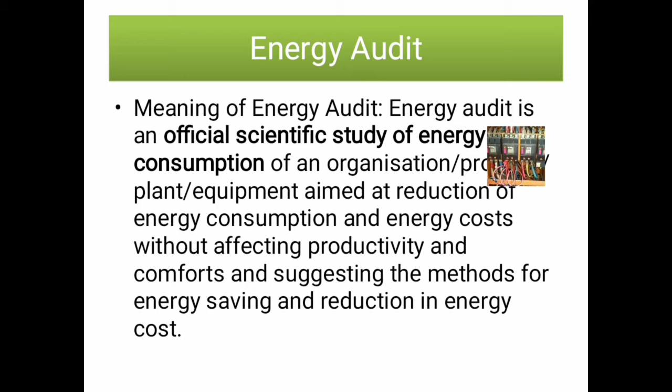So energy auditing can be defined as an official scientific study of energy consumption of an organization or process plant or equipment aimed to reduce the cost of energy, or indirectly we can say the energy audit is to reduce the operating cost of a process or manufacturing cost of a product. So the primary objective of energy auditing is to establish quickly and reliably the basic relative cost of the various forms of energy purchased, their main use, and to identify machine locations where losses, wastages or inefficiency occurs.

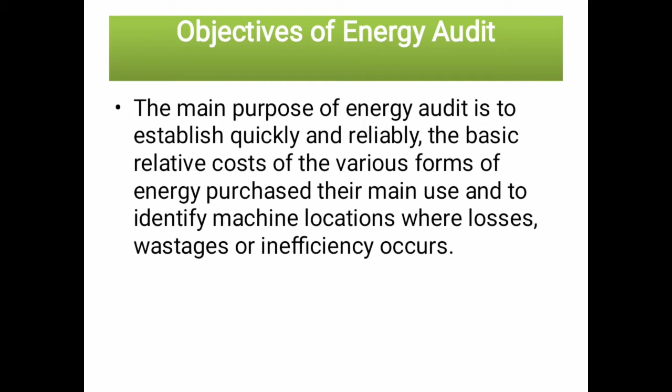So the energy audit team will visit the industry. They will study all the energy consumption equipment. They will study the operating patterns, efficiency of the equipment, energy consumption per hour, per day, per week. They will analyze all the energy bills, oil rate, oil consumption, and finally they will arrive at a conclusion, and also they will suggest some possible ways to reduce the energy cost. So this is the objective of an energy audit.

So energy auditing can be carried out in two types of energy audit. The first one is preliminary audit and the second a detailed audit. The preliminary audit is the pre-audit. So before going to the detailed audit, a preliminary audit will be carried out 10 days prior to the detailed audit, in which they will raise some questionnaires, which is going to help the detailed auditing.

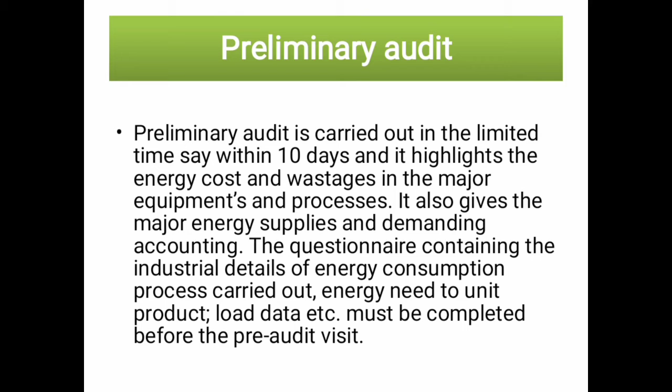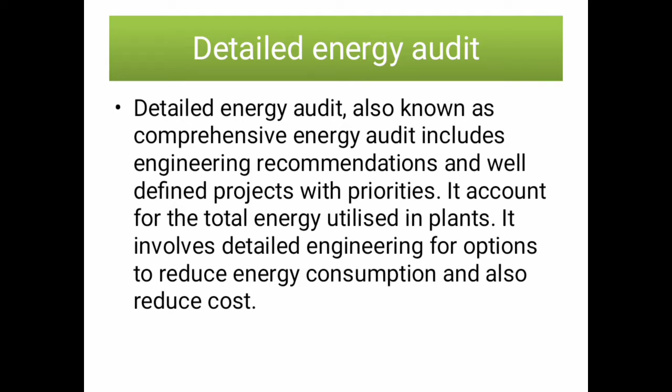So the next, detailed energy audit, includes the overall audit of the entire plant. The plant is divided into several sections. Each and every section the audit team will visit. They will thoroughly analyze the energy consumption pattern of each and every energy consuming equipment. So detailed energy audit includes overall system audit, functional audit, utility audit, and modernization audit.

So overall system: the entire plant, right from the security to dispatch, whatever areas we use energy, whether it may be electricity, petrol or diesel or kerosene, or steam, whatever the source of energy, all the energy consumption equipment has to be thoroughly analyzed, and they will come to a conclusion. Then functional audit: in a plant, a particular unit is taken for consideration. For example, an oxidation plant or a purification plant or a packaging section which consumes more energy, which needs more attention for conserving the energy. So they will audit only that functional unit. That is called functional audit.

Then utility audit. Utility includes the boiler house, compressors, fire hydrant water, cooling water. So the energy utilization in that utility area will be audited and they will suggest some improvement tips.

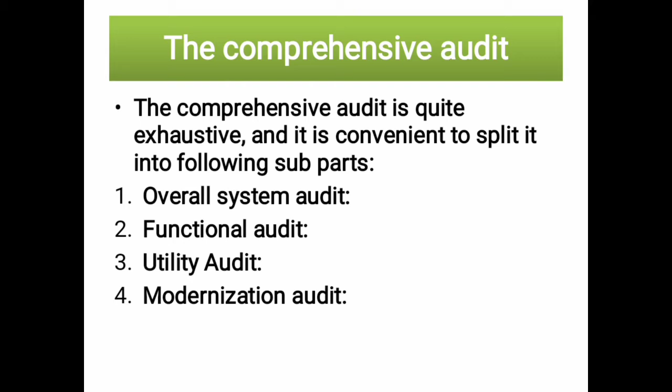Then modernization audit. Within the existing plant, they will go for some modernization of an equipment or a plant. So whether this modernization process will lie within the affordable limit of the energy cost. What will be the additional energy cost we have to invest for modernization? Then how to optimize this energy cost or to reduce the energy cost? The audit team will analyze and they will suggest some useful tips. So this is comprehensive audit.

So typical steps of energy audit. Energy audit can be carried out in various steps.

The step-by-step operation of energy audit is preparation and planning, data collection and review, plant surveys and system measurements, observation and review of operating practices, data documentation and analysis, reporting of the results and recommendations.

So preparation and planning. Before going for auditing, we have to do some preparation and planning. What are the areas to be audited? What are the potential areas which consume more energy? Then what are the data we have to collect from the plant? Whether the EB bill or oil bill, oil consumption, the equipment efficiency, the equipment running time, like that. They have to collect the data.

So before we go to audit, the energy management team will decide what are the areas to be audited, what are the data to be collected, and what review method we have to adopt. Like that they will plan. Then plant surveys and system measurements. What are the plant areas to be surveyed and what systems have to be measured. What measurement system you have to adopt, whether we calculate it in kilowatt hours or oil gallons per hour, like that. They have to decide.

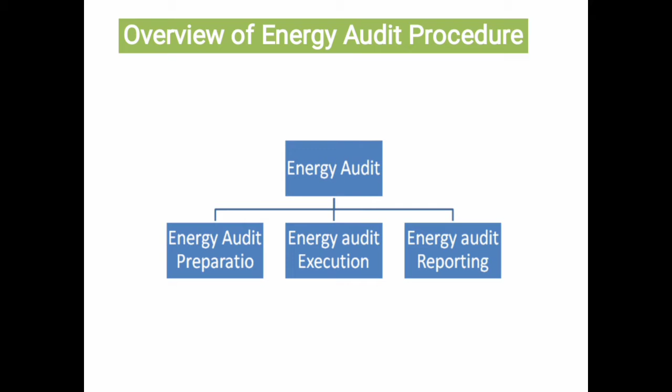So preparation and planning includes audit criteria, audit scope, selection of audit team, audit plan, checklist preparation, initial walkthrough, collecting energy bills and available data, preliminary analysis. Audit criteria includes audit objective, audit type, audit methodology and standards, staff involvement, site or utility boundary, timeline, reporting requirements.

So the audit objectives. What is the objective of audit? By this audit, what are you going to achieve? Whether we are going to optimize the cost, improve the efficiency of the plant, or study the energy consumption pattern of a particular equipment. Like that we have to define the objective in the audit criteria. Then audit type, then audit scope. What are the limitations for the auditors? What are the areas they have to visit? What are the areas we have to include in the particular audit? Like that we have to define the audit scope.

And the selection of audit team, whether we go for internal auditor or external auditor. If it is internal, interdepartmental or intra-departmental audit, like that we have to plan. If external, whether the auditors are from an accredited institute or non-accredited institute. Then audit plan, checklist preparation. Before handing over the schedule to the auditors, we have to prepare a checklist to check whether all the items have been included or not.

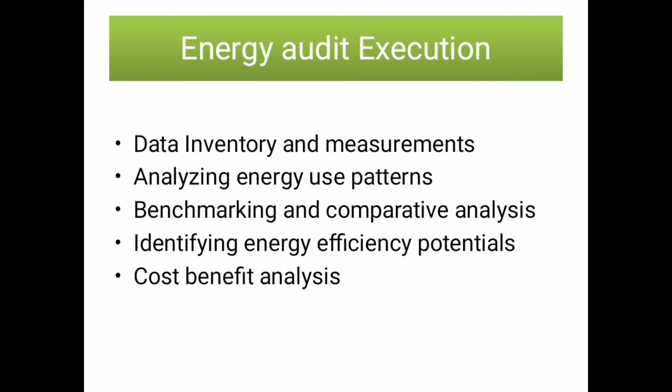The next, energy audit report. So all the findings of the energy auditing will be reported in a systematic manner in a standard format. That is called energy audit report. Writing energy audit report. So it includes post audit activities. After the report writing, the post audit activities will be carried out: the preparation of action plan for implementation and implementing the action plan.

So what are the corrective measures we have to adopt? Is there any technology upgradation required, or some modification required, or some addition or deletion of equipments or instruments? All the things will be prepared and suggested in an audit report. So after that, the implementation of action plan.

So this is the overview of an energy audit. First, preparation and planning, preliminary auditing, comprehensive auditing, audit report and post audit activities. So these are the overview of an energy audit.

Now let us throw some light on what is audit criteria. So it includes audit objective. Audit objective means what we are going to achieve after completing this audit. What are the areas to be focused? Whether we have to improve the efficiency or reduce the cost or reduce the energy consumption. That is the objective of an audit.

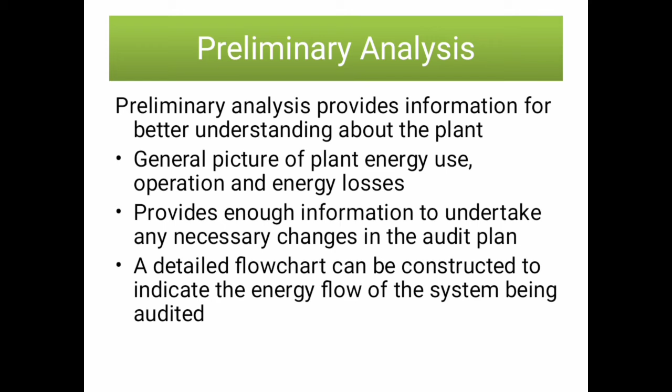Then analyzing energy bills. It includes electricity bill, natural gas bill, and coal and fuel oil usage. So calculating electricity use per day, kilowatt hour per day. Using this kilowatt hour electricity usage, they will find out the load factor. So load factor is equal to energy consumption for the period divided by maximum demand and time under consideration, multiplied by 100.

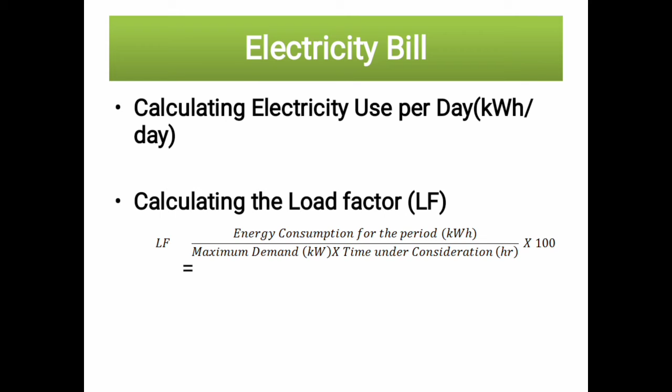So calculating natural gas bill, it includes number of days, reading date, contracted demand, overrun, customer charge, demand charge, gas supply charge, delivery charge, and overrun charge.

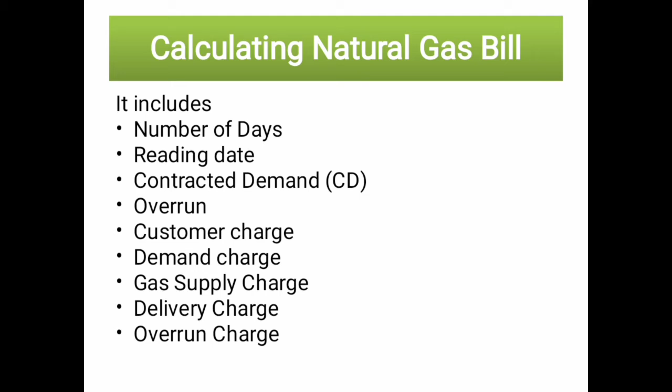Then coal and fuel oil bill. Coal consumption can be calculated based on the combustion efficiency and the energy output of the coal-fired equipment. Fuel oil consumption can be obtained from the meter in the outflow. So we have a fuel tank. From the fuel tank to the equipment, we are pumping the fuel from the tank. So in the line, we will install an oval gear meter or OGM.

Using this meter, we can read out how much oil has been consumed. Then coal consumption can be calculated from the operating efficiency of the particular unit.

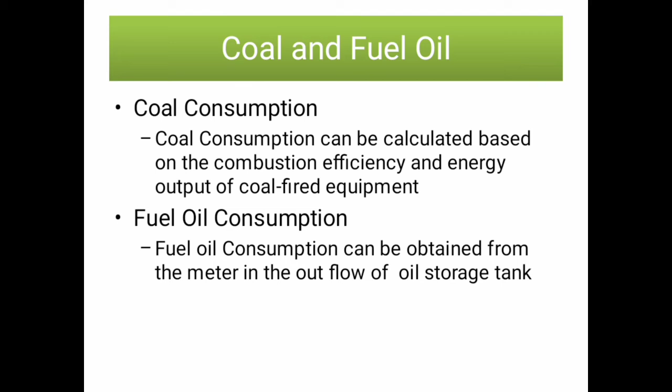So data inventory and measurements. The most common data used during audit are liquid and gas fuel flows, electrical measurements such as voltage, current, power and power factor, temperature of solid and liquid surfaces, pressure of fluid in pipes, furnaces or vessels, exhaust gas emissions, relative humidity and luminance level.

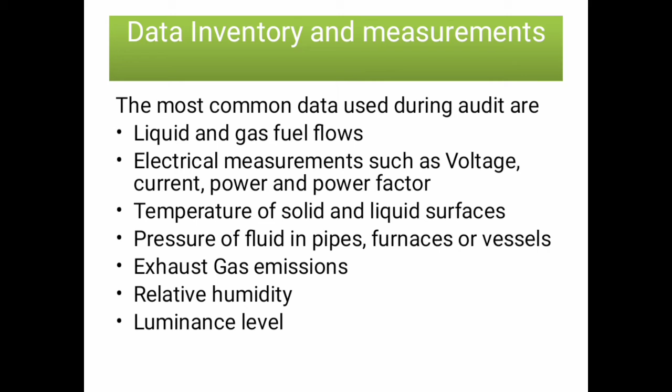So data inventory and measurements mainly focus on electrical load inventory and thermal energy use inventory, which includes where the electricity is used, how much and how fast electricity is used in each category of load. For thermal energy inventory, an energy flow diagram can be used to identify the flow of thermal energy.

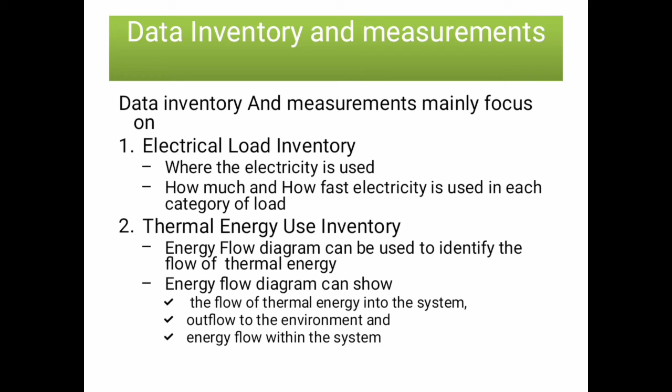So for example, in a refinery operation, the energy from the crude oil is transferred to the distillation column. In the distillation column, the chemical energy is converted into thermal energy. Then thermal energy is again converted to chemical energy. So this is the pattern for energy flow. So this is the typical example.

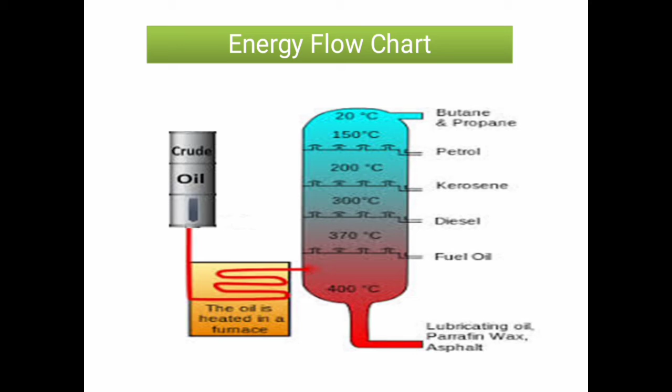The crude oil from an overhead tank is supplied to the furnace. In the furnace, the chemical energy from the crude oil is converted into heat energy. Then it is converted to thermal energy. So in a distillation column, various products are derived at various temperatures. Finally, all the products are converted into chemical energy. So this is the energy flow chart.

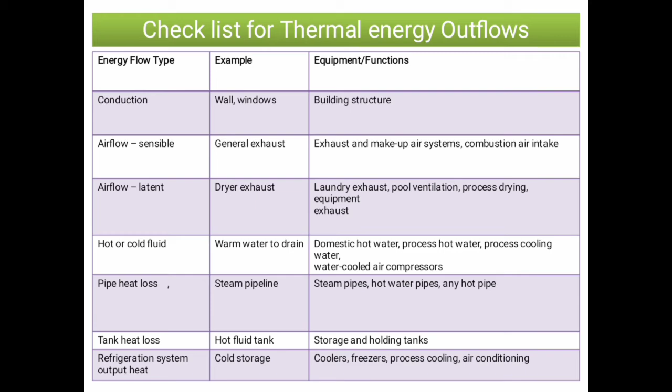Checklist for thermal energy outflows: energy flow type, example, so conduction, wall and windows, building structure. So this is the checklist for energy outflows. So calculation for estimating energy outflows and inflows. The auditor can quantify the inflows and outflows of energy using the energy flow diagram. The energy flow diagram is the tool to analyze how much energy is input to the system, how much energy is released from the system, and what is the accumulation or conversion.

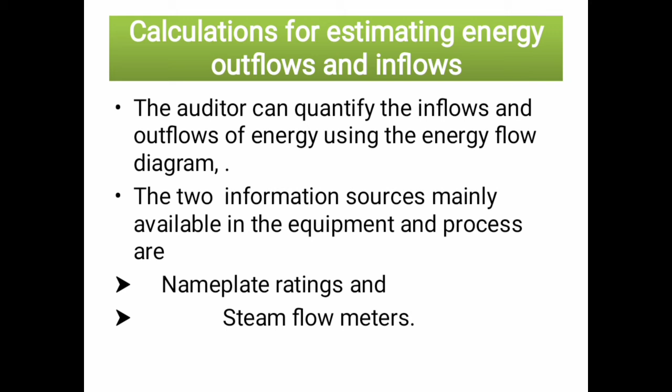The two information sources mainly available in the equipment process are nameplate ratings and steam flow meters. In each and every equipment there will be a nameplate. It will indicate the efficiency of the plant, and steam flow meters are also available, from which we can calculate the steam consumption.

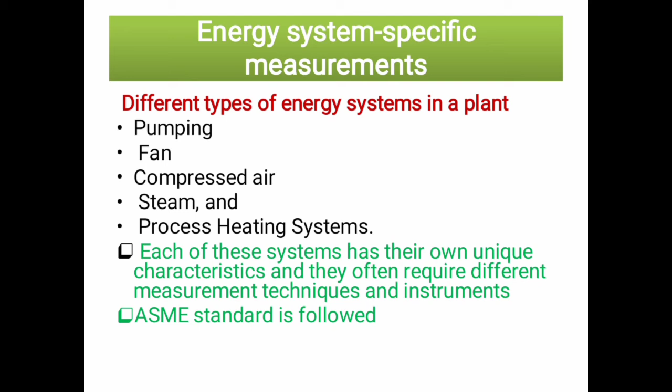So energy system and the specific measurements. Different types of energy system in a plant: pumping, it requires energy; fan, it consumes energy; compressed air, steam and process heating system. Each of these systems has their own unique characteristics and they often require different measurement techniques and instruments. The standard code followed is the ASME standard for energy balance.

Next, energy balance. All energy inputs can be quantified and balanced against all energy outputs. Using this energy balance we can calculate where the energy was lost, and then plan how to minimize the loss of energy.

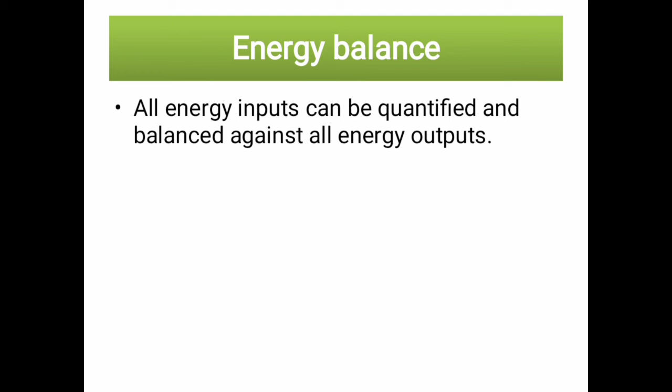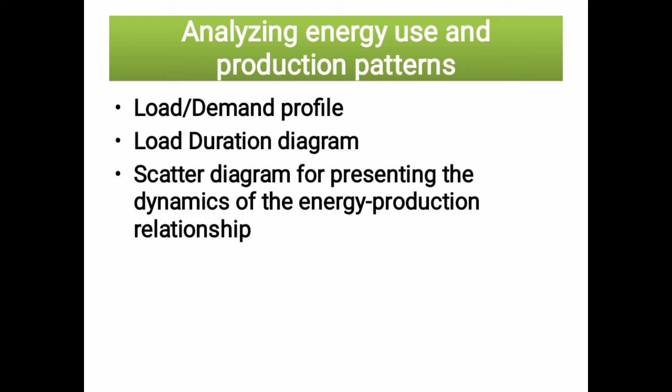So analyzing energy use and production patterns. It includes load demand profile, load duration diagram, then scatter diagram for presenting the dynamics of the energy production and relationship. These are the various tools to analyze the energy consumption pattern. Here we are giving only outlines. Load demand profile is one method for analyzing the energy use and production pattern, then load duration diagram, scatter diagram, then benchmarking and comparative energy performance analysis.

Any similar operation carried out within the plant or outside the plant can be compared, and the best practices followed outside the unit can be copied or followed within to improve the efficiency of our plant. That is called benchmarking.

Plant performance may be benchmarked to past performance, comparing current versus historical performance; industry average, comparing to an established performance metric such as the recognized average performance of a peer group; best in class, benchmarking against the best in the industry and not the average; and best practices, qualitative comparing against certain established practices or groups of technologies considered to be the best in the industry.

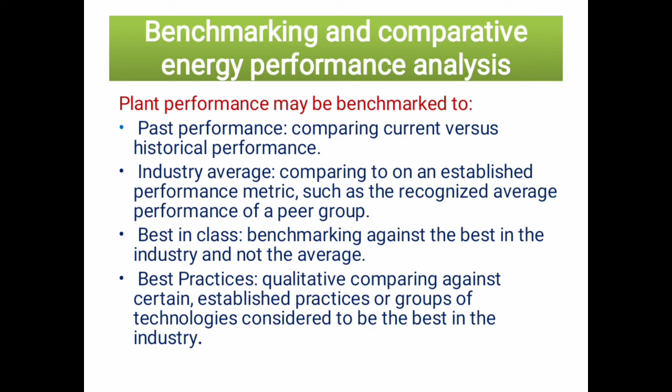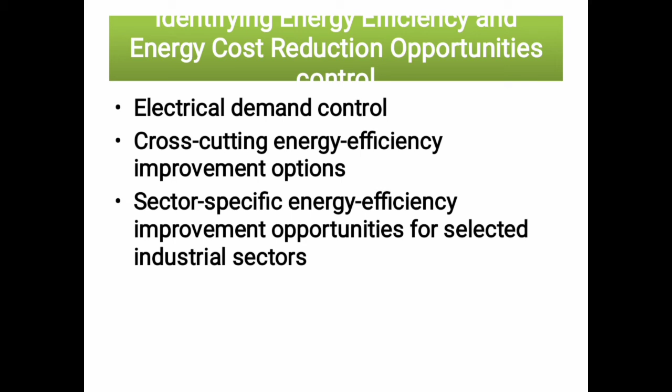Then identify energy efficiency and energy cost reduction opportunities: electrical demand control, cross-cutting energy efficiency improvement options, and sector-specific energy efficiency improvement opportunities for selected industrial sectors. Electrical demand control: demand control is a follow-up analysis that is normally conducted by energy auditors after development of a demand or load profile. Demand control is simply a technique for leveling out the load profile diagram.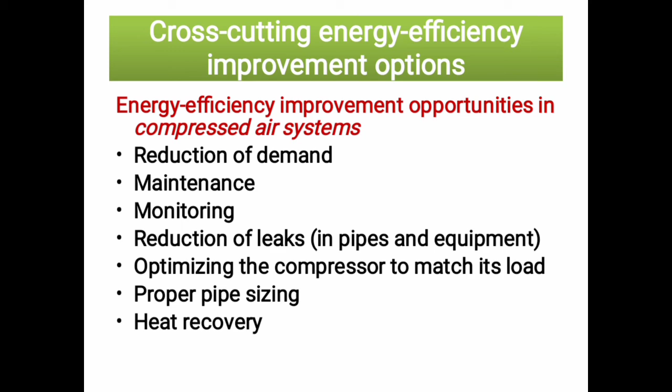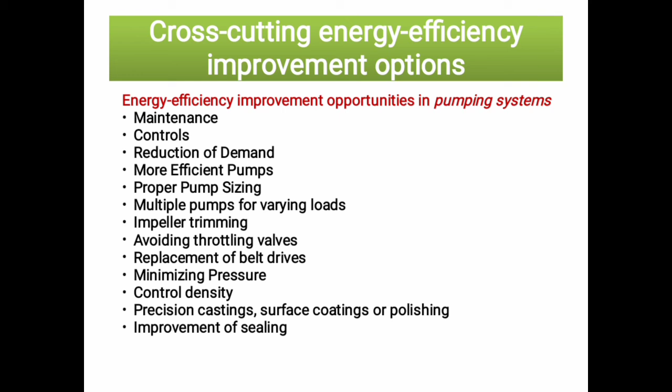Energy efficiency improvement opportunities in pumping systems: maintenance, controls, reduction of demand, more efficient pumps, proper pump sizing, multiple pumps for varying loads, impeller trimming, avoiding throttling valves, replacement of belt drives, minimizing pressure, control density, precision casting, surface coatings or polishing, improvements of sealing. So these are the techniques to improve energy efficiency in a pumping system.

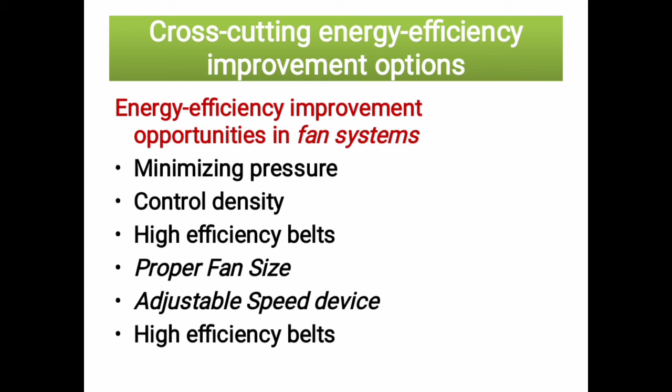Then energy efficiency improvement opportunities in fan systems: minimizing the pressure, control density, high efficiency belts, proper fan sizing, adjustable speed drives. So these are the improvement techniques in fan systems.

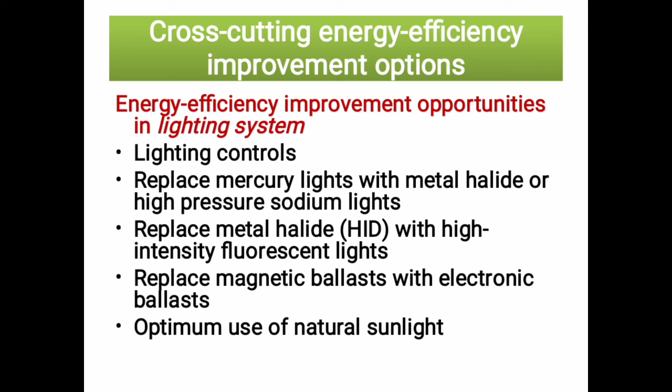And in the lighting system: lighting controls, replace mercury lights with metal halide or high pressure sodium lights, replace metal halide with high intensity fluorescent lights, replace magnetic ballasts with electronic ballasts, and optimum use of natural sunlight.

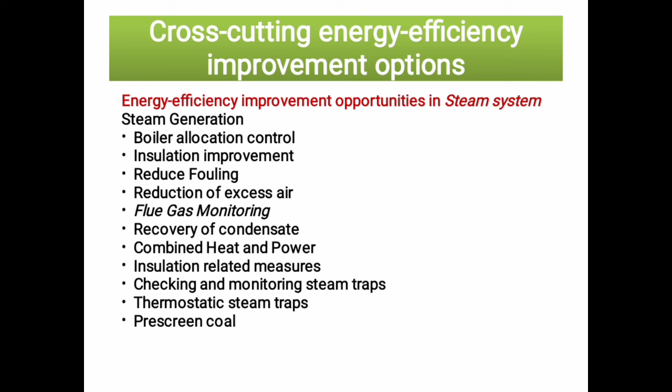Energy efficiency improvement opportunities in steam systems include boiler allocation control, insulation improvement, reduce fouling, reduction of excess air, flue gas monitoring, recovery of condensate, combined heat and power, insulation related measures, checking and monitoring steam traps, thermostatic steam traps and prescreen coal.

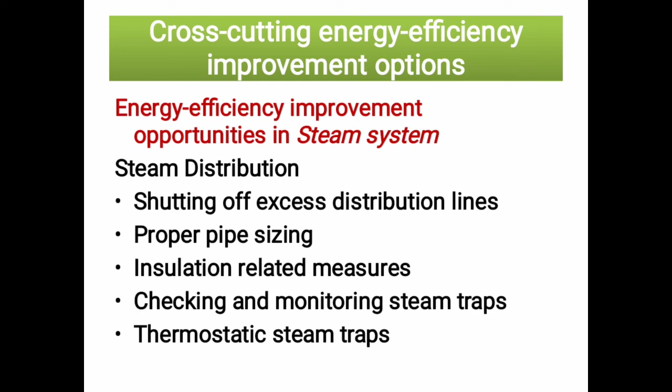Energy efficiency improvement opportunity in steam distribution. In steam distribution we can save energy by means of shutting off excess distribution lines, proper pipe sizing, providing proper insulation related measures, checking and monitoring steam traps, and thermostatic steam traps.

Cross-cutting energy efficiency improvement options for heat generation opportunities, heat transfer opportunities, heat containment opportunities and heat recovery opportunities. We can save energy by controlling the air-fuel ratio, preheating the combustion air, and using oxygen-enriched combustion air for heat generation. In heat transfer, improve heat transfer with advanced burners and controls, 5 to 10% we can save. Improve heat transfer within a furnace, 5 to 10% energy can be saved.

In heat containment opportunities: reduce wall heat losses, 2 to 5% energy saved. Furnace pressure control, 5 to 10% energy saved. Maintain door and tube seals, up to 5% we can save. Reduce cooling of internal parts, up to 5% energy saved. Reduce radiation heat losses, we can save up to 5%.

Then heat recovery opportunities include combustion air preheating, 10 to 30% energy can be saved. Fluid or load preheating, 5 to 20% energy saved. Heat cascading, 5 to 20% energy saved. Fluid heating or steam generation, 5 to 20% energy saved. Then absorption cooling, 5 to 20% energy savings.

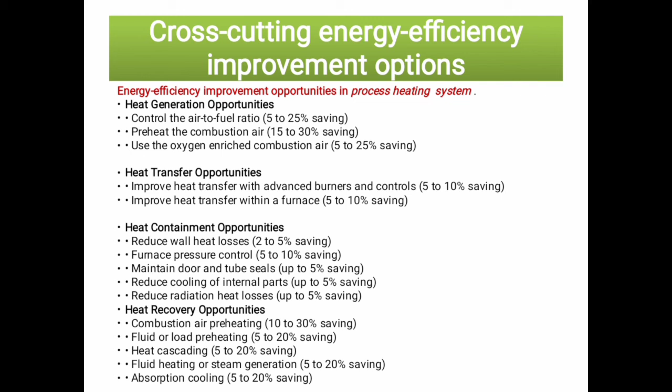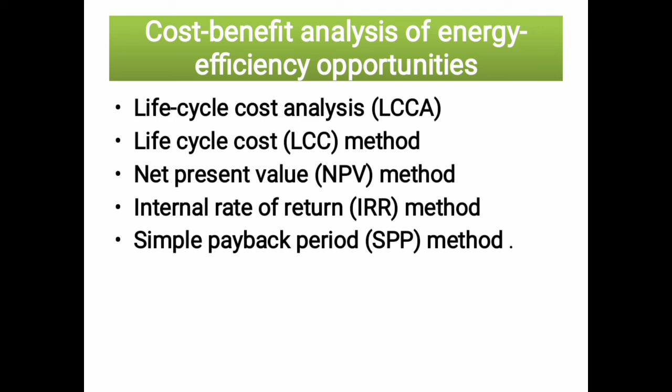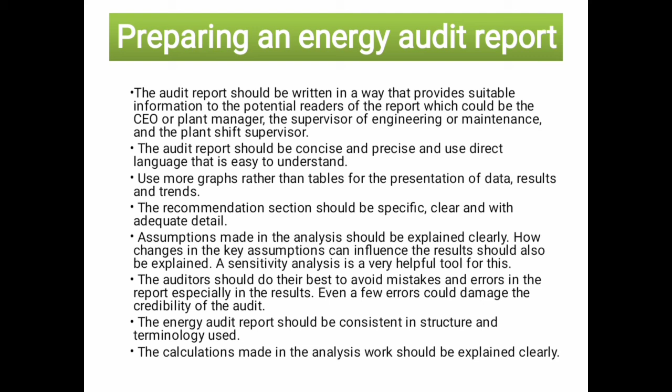The comprehensive energy audit report generally covers energy conservation opportunities, energy conservation measures, projected investments for energy conservation measures, projected annual savings and payback period, and feasibility studies for retrofitting modification work. Post-audit activities include creating an action plan for the implementation of energy efficiency measures and implementing the action plan.